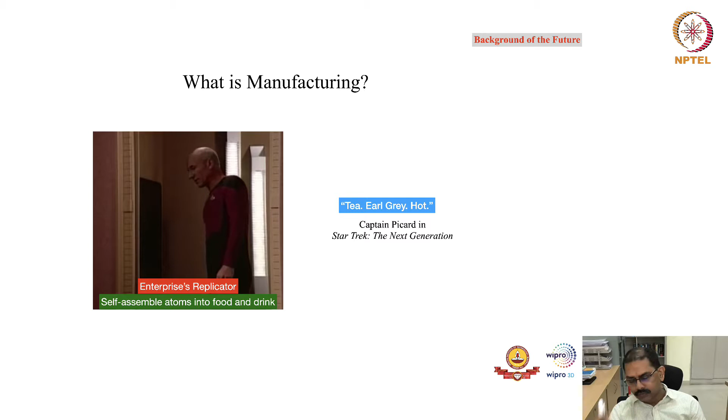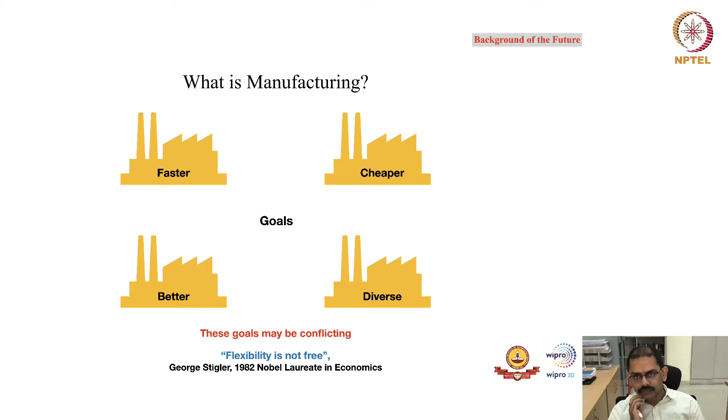Before I start today's discussion, let me revisit some of the points we already talked about. We started with what is manufacturing, and mentioned the four important goals: you want to make things faster, cheaper, better, and diverse. We also mentioned these goals may be conflicting, so flexibility is not free. If you want higher flexibility, you have to forego something, so there will be trade-offs among these goals.

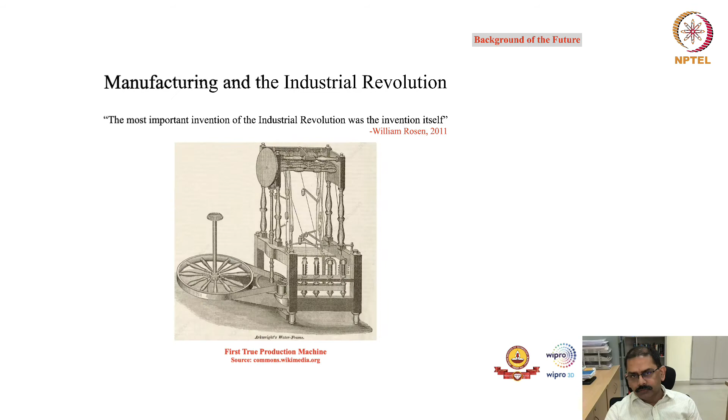We looked at some macro data and talked about the increasing importance of China as a manufacturing superpower. We talked about different manufacturing processes, from job shop to batch to assembly and continuous.

And we got some wisdom about the trade-off between volume and variety, which comes as part of the Hayes and Wheelwright product-process matrix. We also mentioned whether it is possible for technology like additive manufacturing to actually move that diagonal trade-off towards something which is technically infeasible as of now.

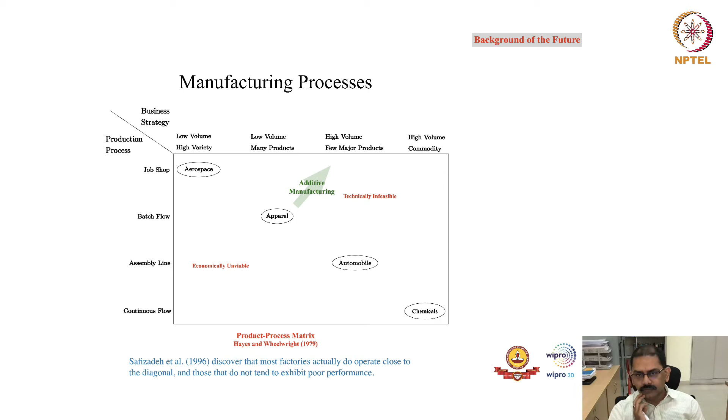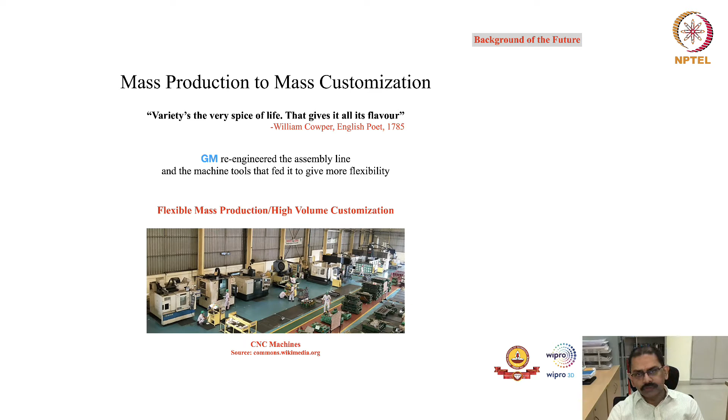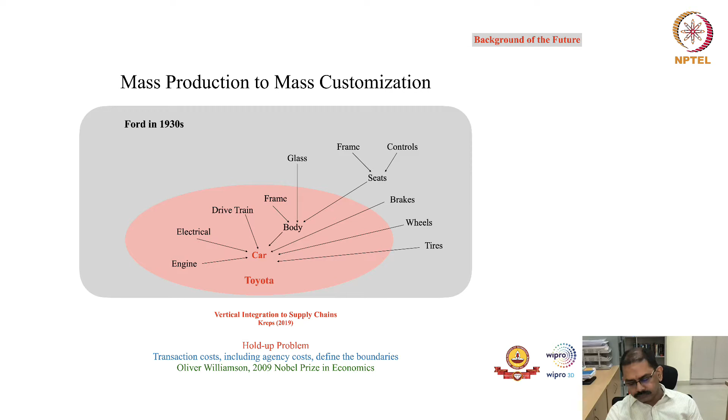So this wisdom, and then we talked about different eras of manufacturing, from mass production to mass customization. I think this is important because transaction cost defines the boundary, so whether newer technology like blockchain can actually redefine the boundaries of the organization.

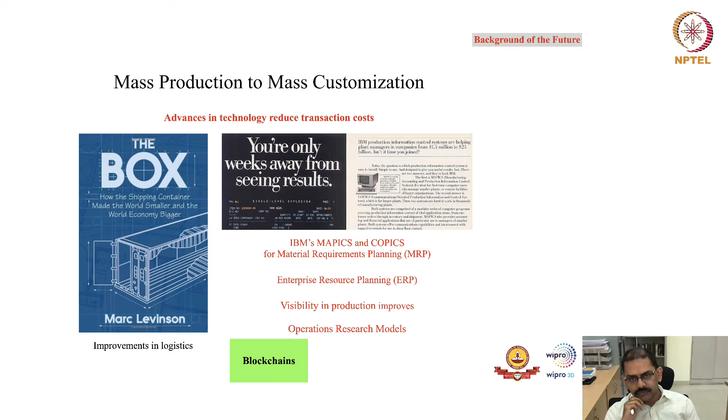In fact, today's discussion, I will try to talk about digital supply networks. That may be the next level of organization structure in the context of manufacturing.

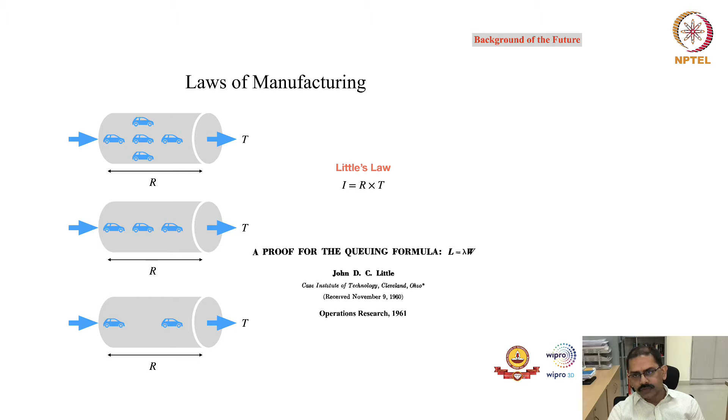Then we talked about whether technology of machine intelligence, IoT platforms, and then we also had a very brief discussion on the laws of manufacturing, from Little's law to Kingman's law. If you recall, these laws give the wisdom why the status quo is like this.

Why you want lower inventory, because that would reduce your cost and reduce the batch size. We also talked about how you reduce the setup cost, because setup cost has direct implication on the batch size, and then Little's law comes into the picture, because if you reduce the setup cost, your Q star will come down, your average inventory will come down, and if average inventory comes down, your cycle time actually improves.

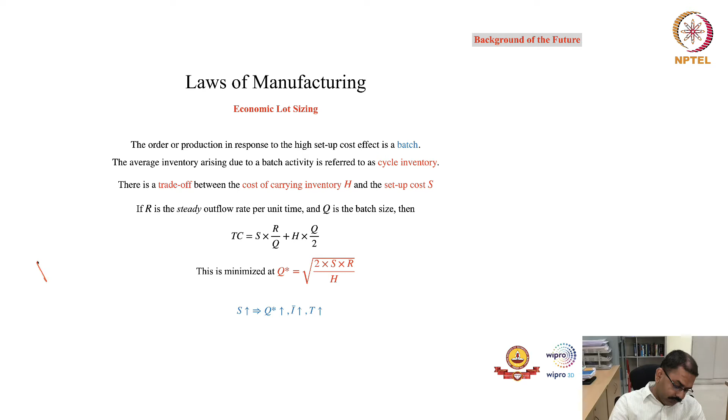So all these things are related. You can actually call it the physics of manufacturing. In fact, if you are keen, you can look at a book titled Factory Physics.

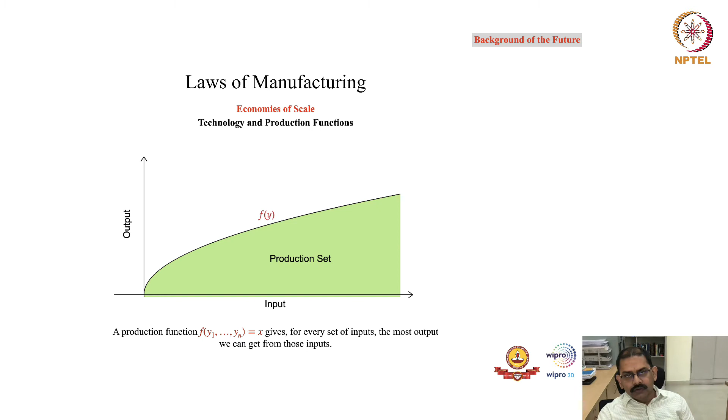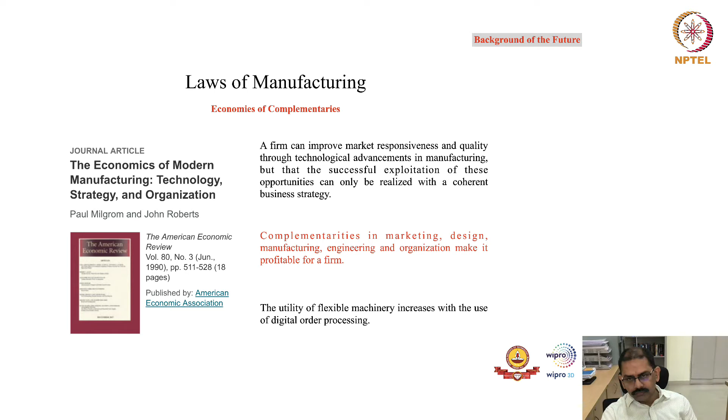Then we talked about what are economies of scale, economies of scope, and economies of complementarities. In fact, this point will come again today. Then we talked about business models, and we also talked about why servitization as a business model could lead to successful organizations, because you can see that the value-added part is part of the smiling curve.

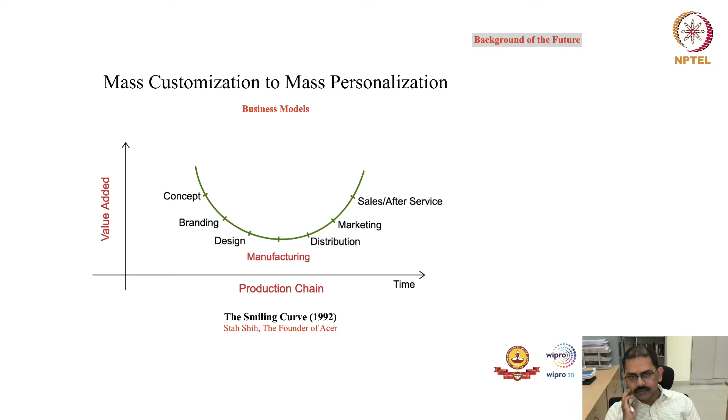So yeah, this five goals will still be there, and the point here is whether the technology, the societal needs, and the market needs, when they converge, how they integrate with the technology to achieve these manufacturing goals.

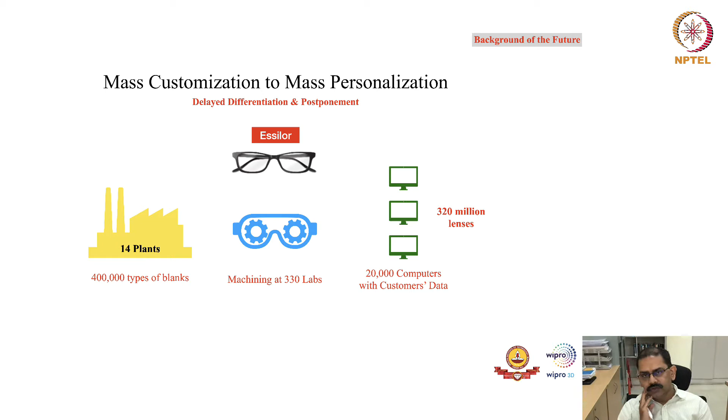So we talked about going from mass customization to mass personalization. I gave you an example of how technology is actually matching demand with supply, and one example was delayed differentiation and postponement.

That is true not just for eyeglasses, it may be true even for products like a computer. So Dell is doing something similar, we call it the vanilla boxes, where the configuration of the final product happens closer to the customer.

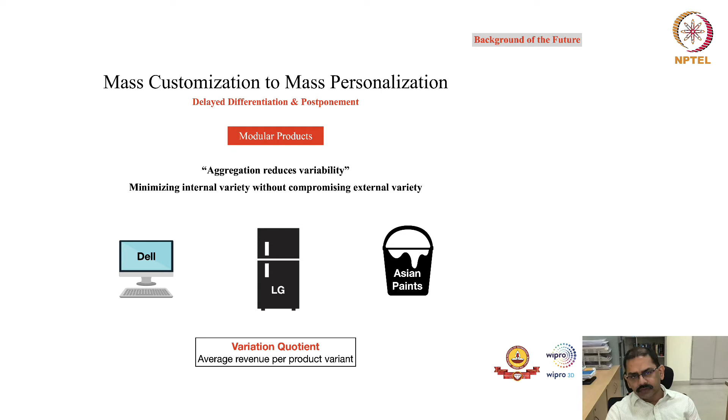LG is doing something in terms of modularity. Asian Paints, in fact, could be just one example; other paint companies may be doing something similar. And the main wisdom here is aggregation reduces variability, and minimizing internal variety without compromising the external variety.

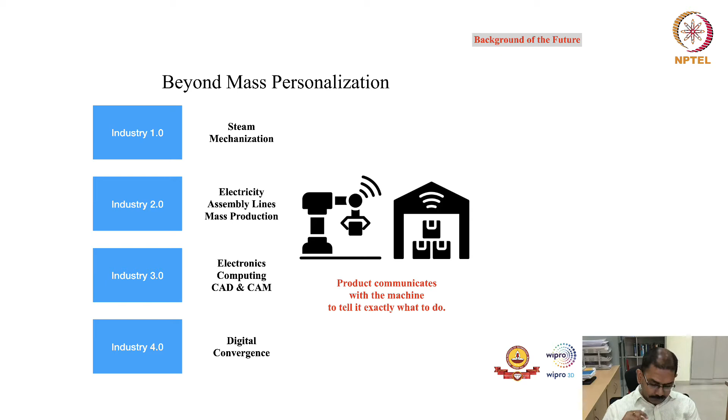So then we talked about how you actually go beyond this mass personalization, and that is where the Industry 4.0 part comes in. So then I gave you the example of Siemens, we talked about how they are actually doing this — it's not just automation, it is actually going beyond that.

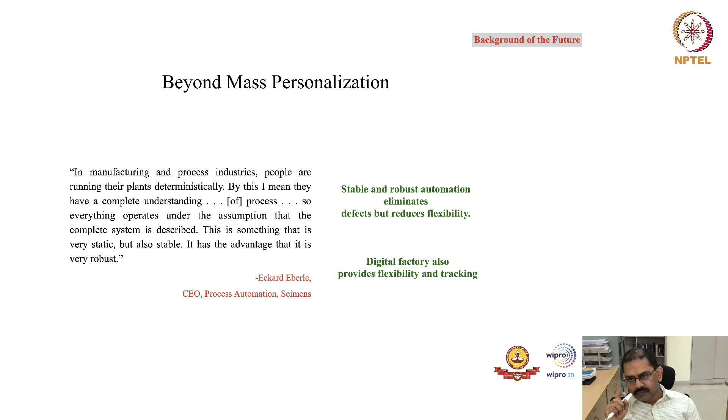And when we talk about digital factory, it actually provides flexibility and tracking. Remember that this tracking part is still relevant to how you actually make the process as transparent as possible — can blockchain allow us to do that? So yeah, this is something which I discussed in the previous sessions, where we talked about technology and manufacturing.

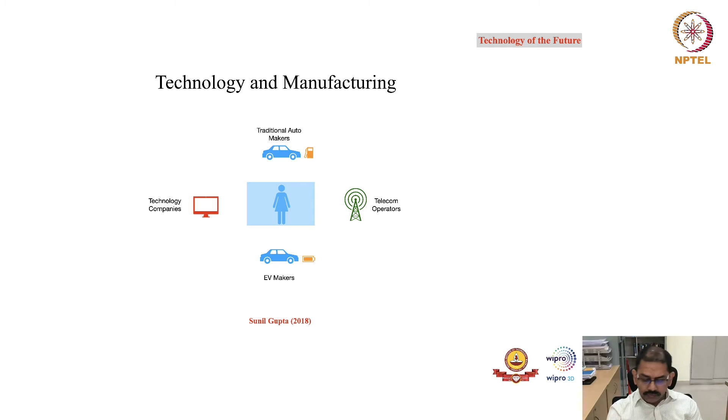We talked about digitization and the future of many operations. I gave the example of a company like John Deere, a major agricultural equipment manufacturer, that is now becoming more like a data analytics company. In fact, the whole business paradigm may be changing, with the customer at the center. You can see traditional OEMs, EV makers, technology companies, and telecom operators all becoming part of one ecosystem, and this whole paradigm is changing.

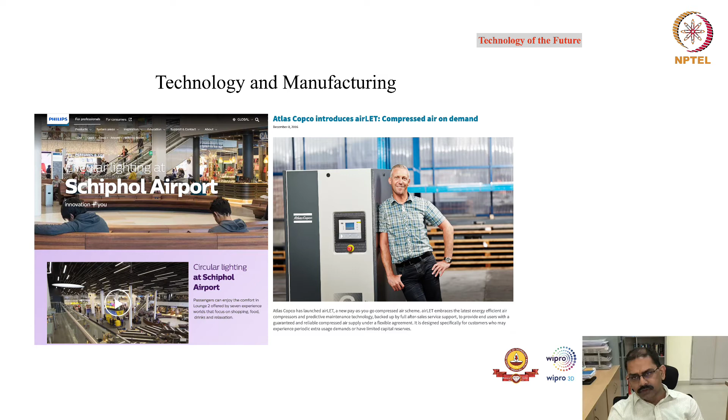Then I gave examples of servitization. You can see lighting as a service, as well as compressed air as a service. We briefly talked about Predix as a platform, mainly for predictive analytics, and I gave insights about how it can be relevant in the context of manufacturing.

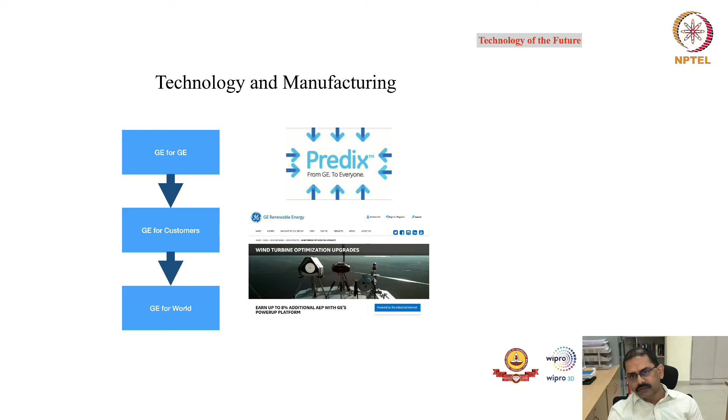In fact, this should be the most revolutionary idea, that you can actually talk about manufacturing as a service. I gave the example of Voodoo Manufacturing, who are looking at servitization of manufacturing.

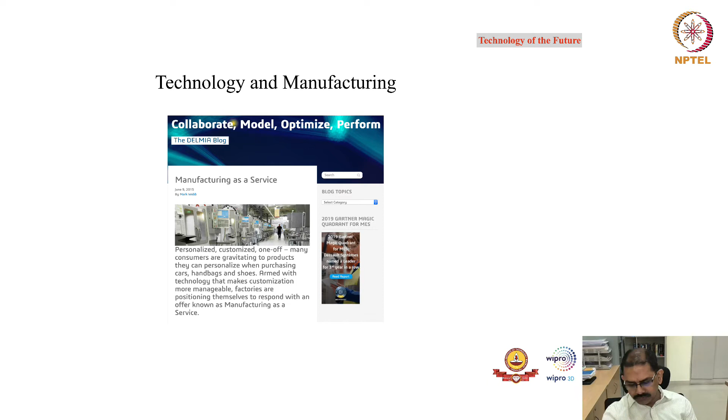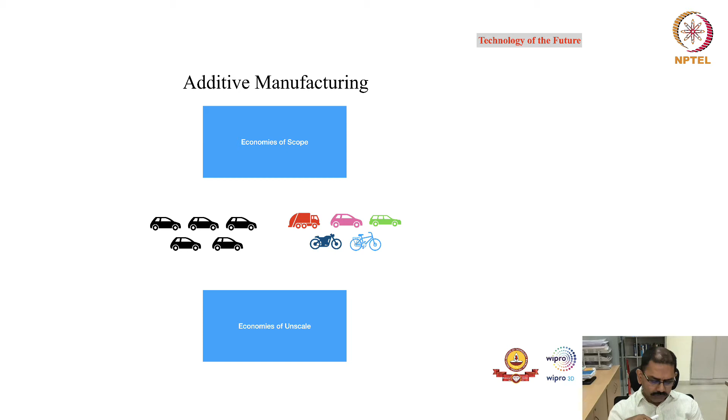Then we briefly talked about additive manufacturing, which Dr. Chandrasekhar will cover significantly. What advantages come along with it? It brings economies of scope, and it also brings economies of unscale for scaled-down organizations. That is the new wisdom. The traditional wisdom was always to look for economies of scale, and now we are talking about economies of unscale. Today's discussion will cover some part of that also.

If you recall, we talked about some advantages that come along with it: ability to produce complex products, customization, on-demand production, reduced cost of inventory, both in transportation and inventory, because you may be producing closer to the customer. Along with it, we could have design platforms. Today's discussion, I'll try to bring some of these issues in more detail.

We looked at how economies of scale is related to additive manufacturing. Remember, this scale part is very important. The traditional wisdom in AM is that for small scale, AM may be better, but for large scale you have to go for traditional manufacturing. But that wisdom is changing, and you would actually see scale effects in additive manufacturing also, for some of these reasons.

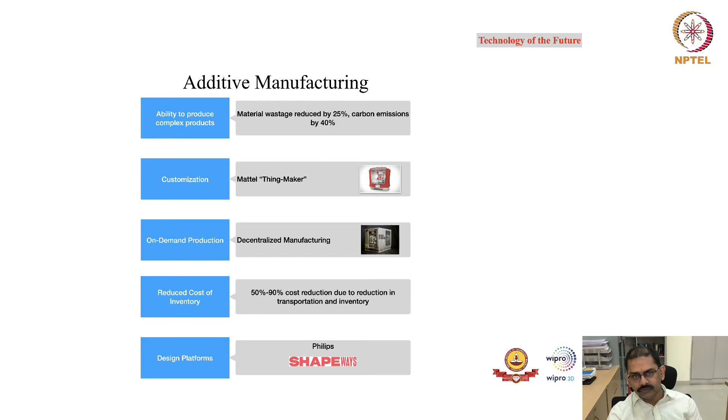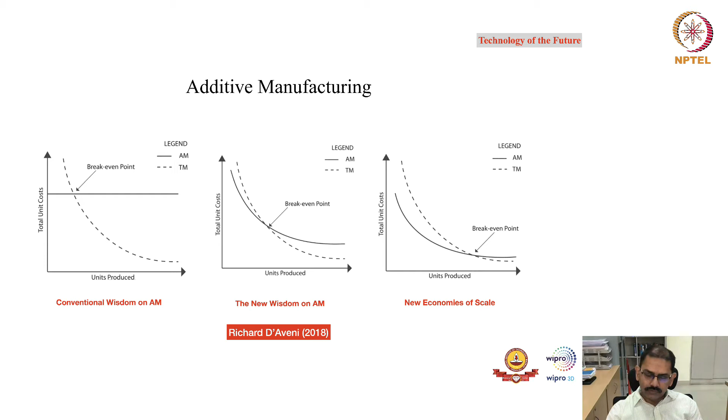I gave some examples of next-gen AM. Let me continue the discussion on technology and manufacturing. Today I'll go more into digital supply networks, and I'm going to discuss briefly AI and blockchains, with some use cases, which gives you complete wisdom on how things are changing in the context of manufacturing.

Once my part is over, you'll see discussion from Dr. Chandrasekhar, confined to the additive manufacturing part. Other things may still come up, but the main focus will be on additive manufacturing. I think that will give you complete clarity on how these technologies integrate. Because of paucity of time, our emphasis would confine only to additive manufacturing.

But down the line, it may happen that we come up with more courses where you would see the future of manufacturing business, the role of machine intelligence, where the emphasis would be on how you integrate machine intelligence with manufacturing.

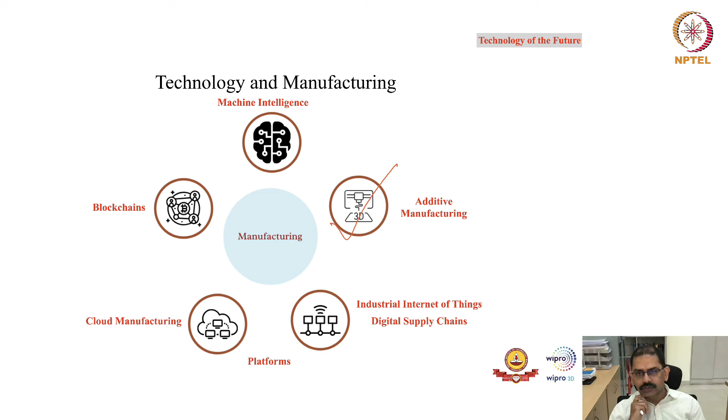Now, it is important to understand the context of manufacturing, because in modern times you cannot decouple supply chains from manufacturing, how things are manufactured, and you might have seen the Ford relation and the Toyota relation in that context.

Most of the time, the common term used for some of these things was part of logistics, and the procurement style was because some of these war-related concepts developed during World War II. The thinking was still more like military procurement, in terms of maintenance, transportation. Organizations were not fully realizing the trade-offs and benefits of providing the right good at the right time at the right place.